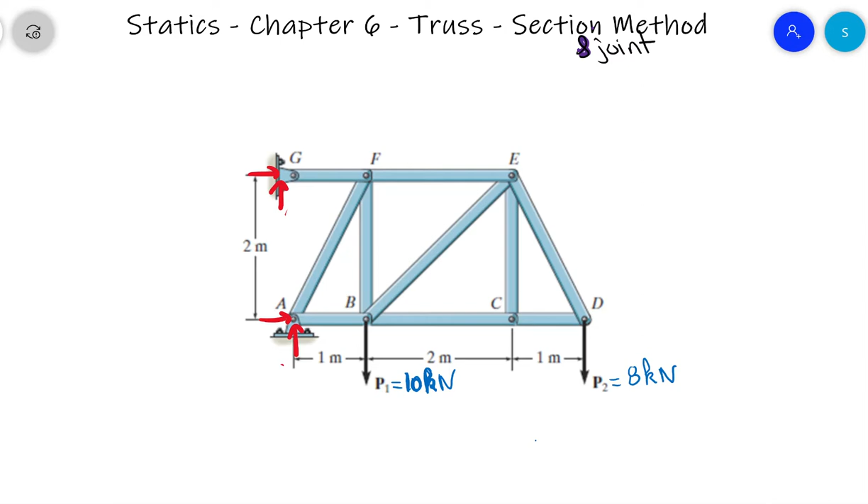Look at joint C. At joint C, we have 3 members, and 2 of them are collinear. So this means that the third one is a zero force member, and we do not need to include it in the free body diagram.

I want to show you something, because in your online quiz I asked you to find this. There's a very simple way to find it. We cannot use the joint method because if we look at these joints, we have 1, 2, 3, 4 unknowns. So we cannot use the joint method with just one equation and one free body diagram.

But if we cut here and keep the right side, the free body diagram will be this. We cannot do it with the left side because on the left side there are about 4 unknowns plus those 3 unknowns.

But if we use the right side, what we have is something like that. We have a known force of 8 kilonewton, and we have 1, 2, 3 unknowns. Let me make it a little bit stronger.

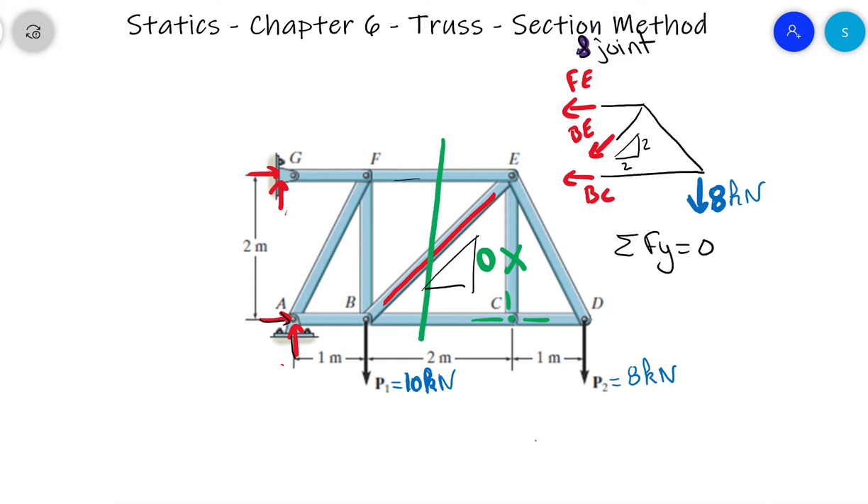So we can write the equation: sum of forces on Y equals 0. We have minus BE times cosine 45 degrees, minus 8, equals 0.

So BE is equal to minus 8 divided by cosine 45 degrees. The minus means it's in compression. 8 divided by cosine 45 is 11.3, so BE equals minus 11.3 kilonewton.

Okay, so we have this one, and now we have BE equal to 11.3 kilonewton. What can we do next?

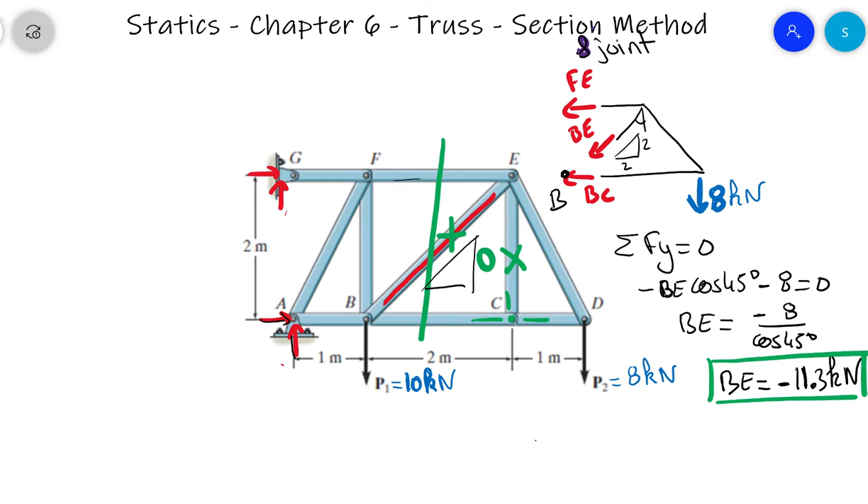Let's use the same free body diagram. We can use point B to solve for FE, and we can use point E to solve for BC. I like to do that — we just get our truss there.

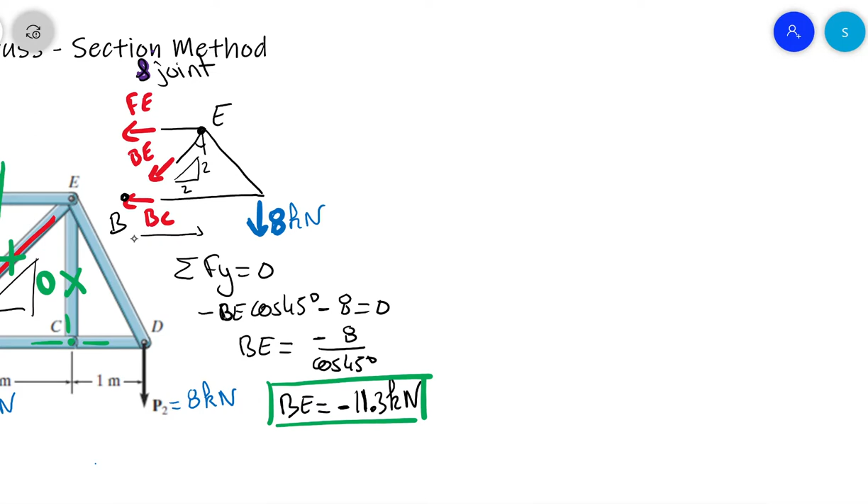Let's take the moment about E. This distance is 2, but we also need the total distance from B — this distance is 3 meters, and this distance is 2.

So let's do sum of moments about E equals 0. We have 8 times this distance — oh, I forgot to write this distance, so that's 1. So 8 times 1, and this one turns in the negative direction.

The only force left is BC, and it's also rotating in the negative direction. So minus BC times the vertical distance, that is 2, equals 0. So BC is equal to minus 4 kilonewton.

Oh, I forgot to write — so it's compression. This one also is compression. So let's call that BC.

Yeah, I didn't write F, BC, F, BE. But I could have. Let's do the moment about B.

Also, we have B. Which one we found? BC, so we found this one. Moment about B, so this one. So we have the 8 that is rotating in the negative direction, but this time is 3, minus 8 times 3, and FE is going in the positive direction. So plus FE, we cannot have the 3 of them in compression.

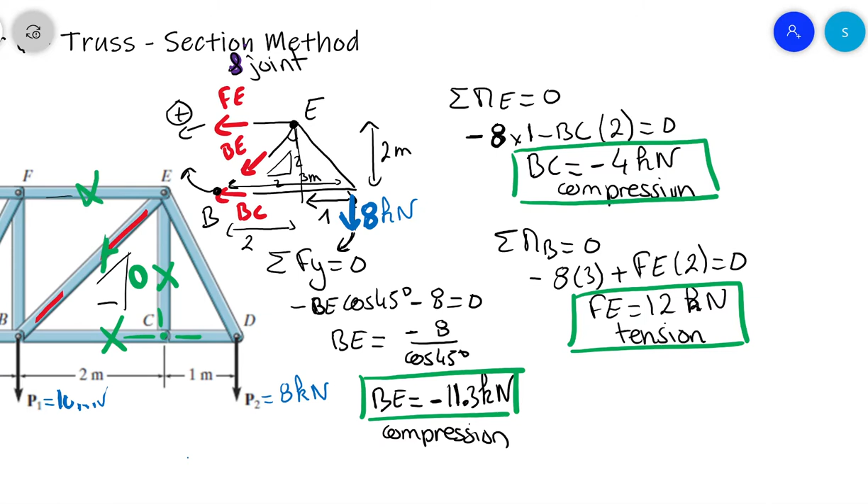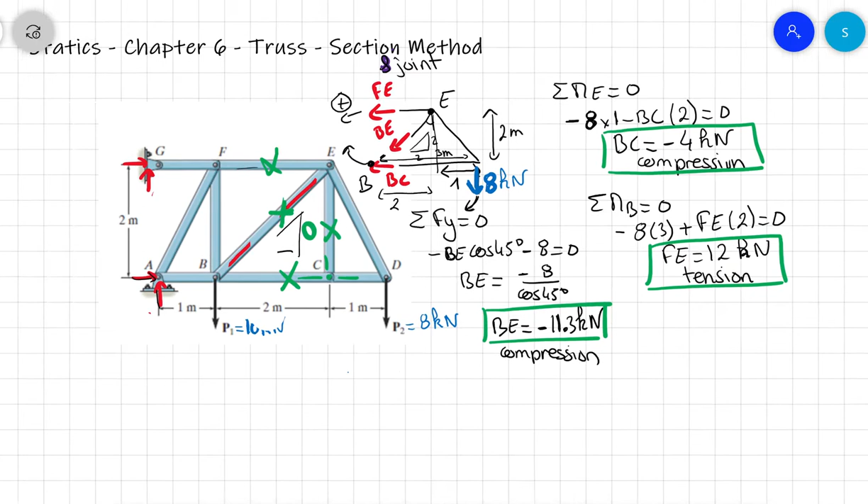Okay, so we have this one. Let's remove my cut because we don't need it anymore. Okay, so maybe now we can use the joint method. Oh my god, that's my previous problem. I'm lost. This one. Okay, we can use the joint method at C.

So if we do at C, so if this one is in tension, if BC, so that one is BC equal 11.3 in compression. This one is also, so it's CD 11.3 in compression. So CD is equal to 11.3 kilonewton.

Let's put a minus just to say that it's a compression. It's not because it's a minus that it's a compression, it's because I guess that it was a tension, so my positive direction is tension. So CD is equal to minus 11.3 kilonewton, is called 11.3 kilonewton in compression.

We missed this one. Let's solve this one. Let's do the joint D. Now we come back on the method of joint. So we have the joint D. So that's my joint D.

We have the 8 kilonewton going down. This one is compression. Oh my god, we are on the joint. So we know it's compression. So it means that the joint is pushing on the member. So the member is pushing on the point D, and that's 11.3. And this one will be up, has to go up. That's ED.

And the slope, we have 1 and 2. 1 and 2. So this is the square root of 5.

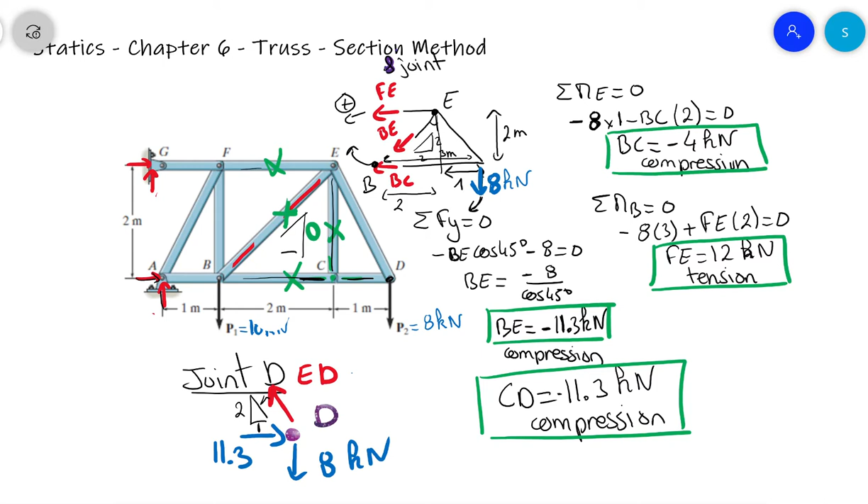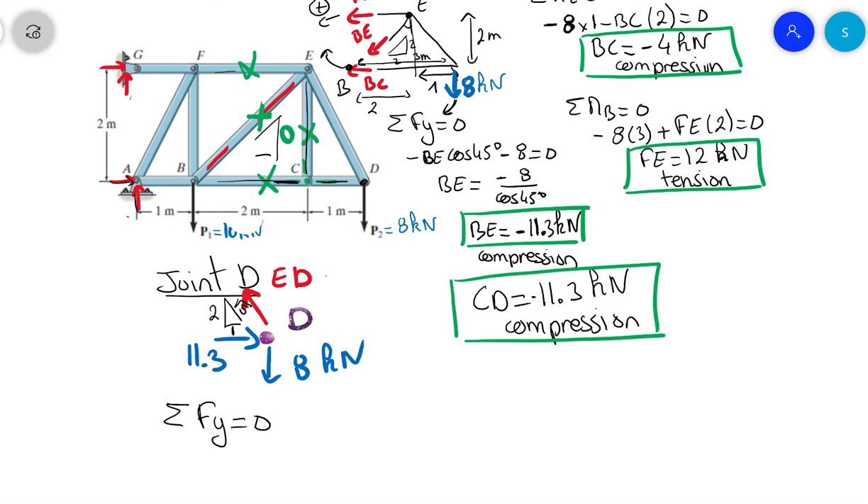Okay, so if we do sum of the force on y, it's equal to 0. We can use either one, x or y. But if we did a mistake at 11.3, if you use x, we will reproduce a mistake there. If you use y, we don't reproduce the mistake. So sum of the force on y equals 0.

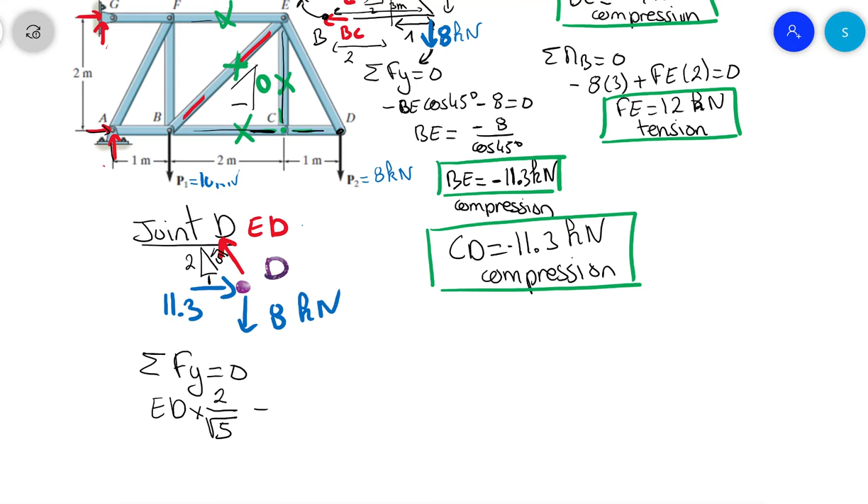So we have ED times 2 divided by square root of 5 minus 8, it's equal to 0. So ED, it's equal to 4 square root of 5. 8 divided by 2, so 4 square root of 5, it's 8.94 in tension.

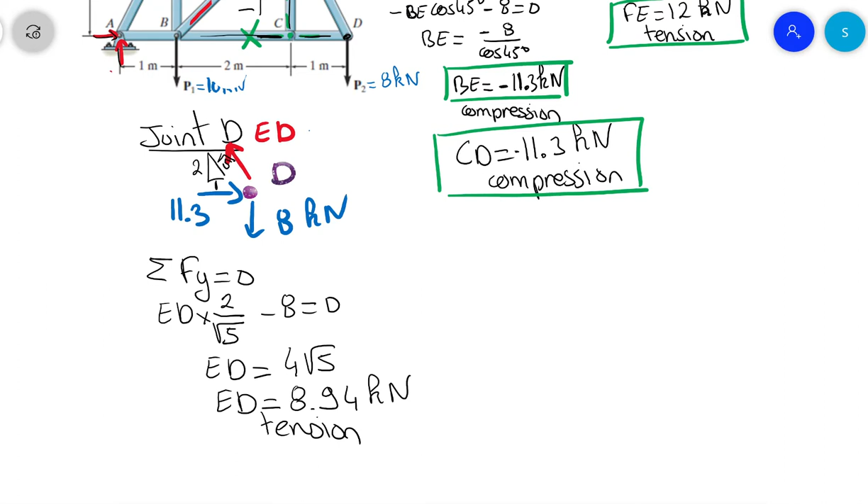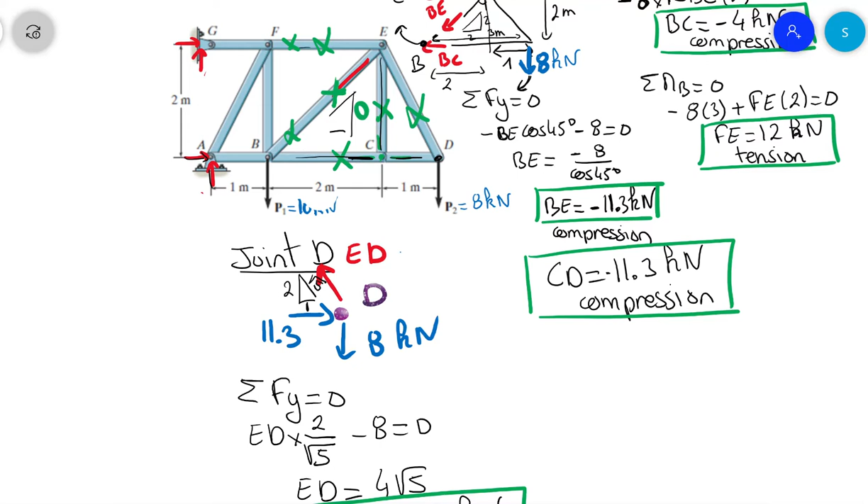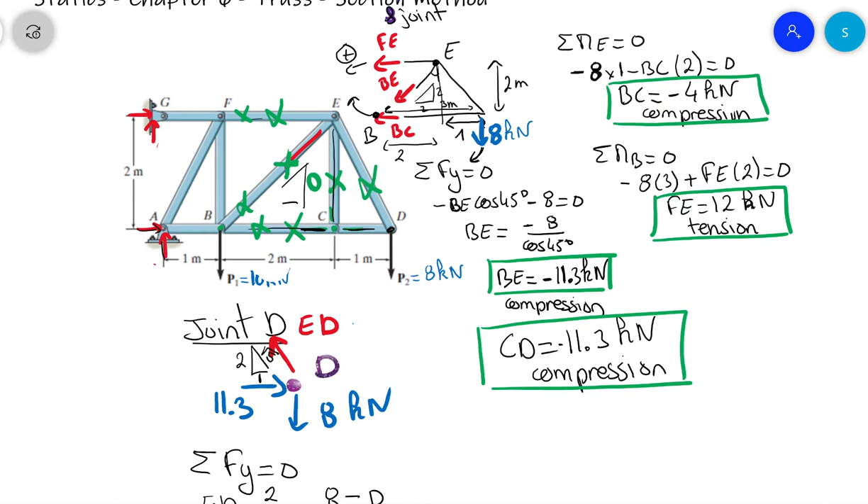Here we go, so we have this one. Okay, so we know this one, we know this one, we know this one. We know everything to the right. At B, we can do an analysis of a joint, and after that, we will know BF and we can do a last joint at F.

So let's do my joint there. I need to do my joint B first. I don't have a choice because here I still have 3 unknown. So joint B. Okay, so that's my joint B.

I will have forces everywhere. So that's my joint B. What I know it is 10 kilonewton. This one is compression, so compression is pushing on the joint, and it's 11.3. This one in BE, we find 11.3 in compression, so 11.3, and we know that the angle is 45.

Okay, and we have force at B, so it should be positive, and this one should be to the right to compensate. Everything is going down and left, so we need some forces up and right. So AB and BF. It's a joint, so joints mean we just have force on X and force on Y available. Either one will work.

So let's do sum of the forces on X. It's equal to 0. We have AB minus 11.3 minus 11.3 cosine 45 degrees. It's equal to 0. So we have AB that is equal to, and it would be plus 11.3 plus 11.3 cosine 45 is 19.3.

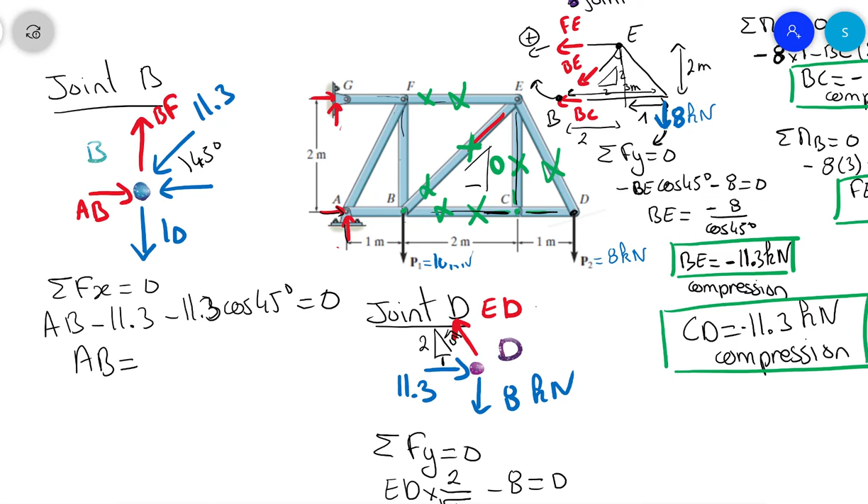Is it BE? 11.3. BC there is not 11.3, I missed that. And my BC is 4 in compression. Okay, this one is 4. I knew that wasn't the right answer. So minus 4...

Minus 11.3 cosine, so 4 minus 11.3 cosine 45, and that's... what did I write? Oh, that should be 8, 12. 4 plus 11.3, cosine 45, 12. So it's 12 kilonewton in tension.

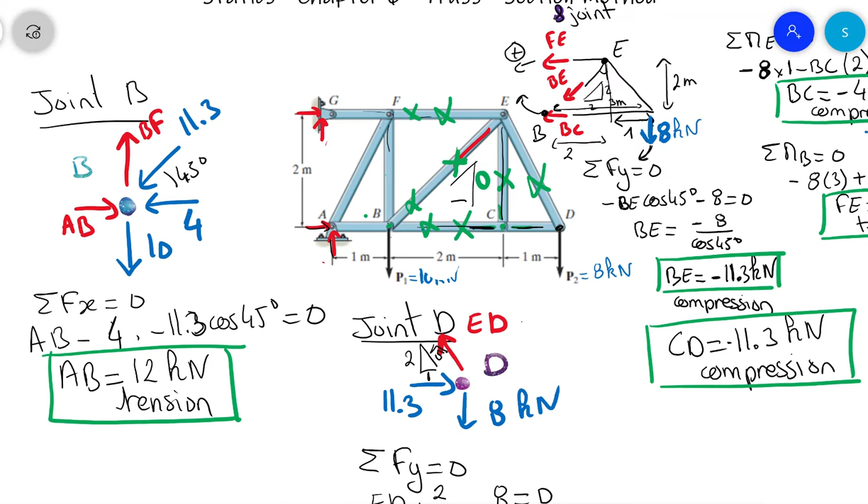Well, we got this one. And if we do joint B, sum of the forces on Y equal 0. So we have BF minus 10 minus 11.3 cosine 45 equal 0. And the 11.3 cosine 45 is always the same. So BF is equal to 18 kilonewton, and it's in tension too.

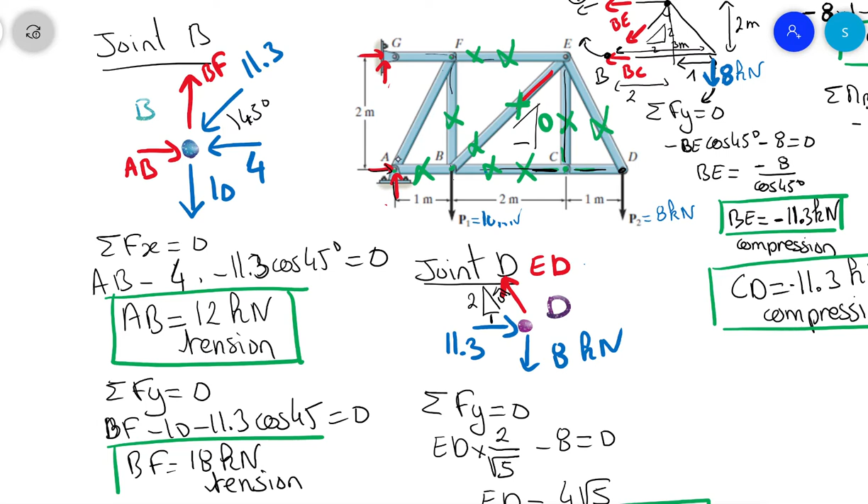We're almost there. Okay, so we find BF. Now we can do the final joint to find the last one. We can also go at A. Oh no, we cannot go at A because we cannot solve for AX, AY, and this one. We need to go at F, so we need to do joint F.

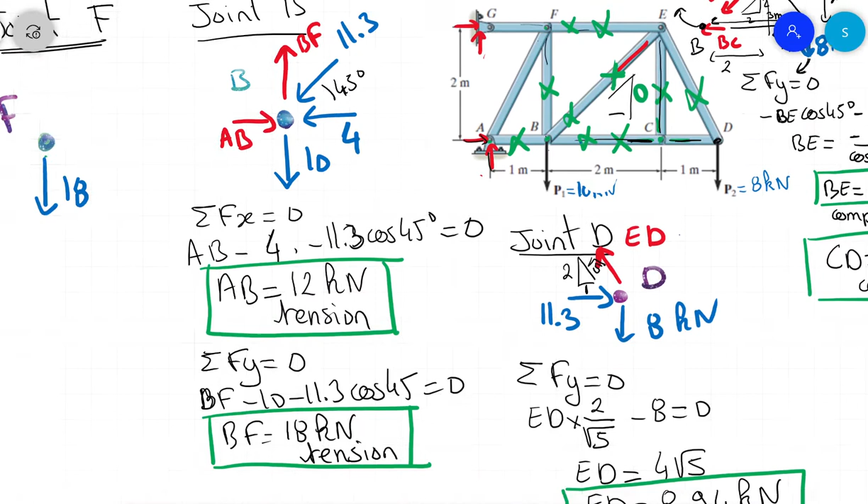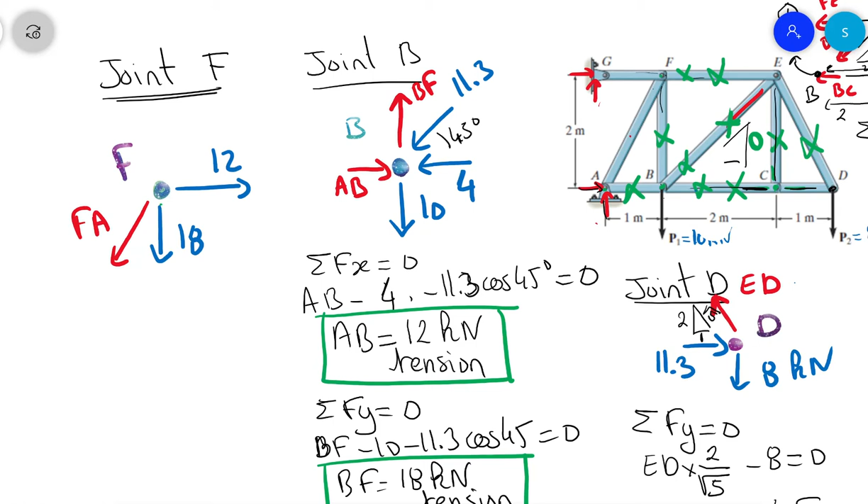12 in tension, so 12 in tension for FE. BF, it was tension too, yes, 18. And the four that we don't know, we have this one, that is Fa. And this one, that is Fg. Oh, this one needs to go up.

Can put it this way. And Fg is easier to guess right, left, up, down with the joint method. And Fa, it's 1, 2, and square root of 5 triangles.

Okay, so let's do the force on Y first, because on X we have 2 unknowns. Sum of the force on X is equal to 0. So we have Fa times, so on X it's 1 divided by square root of 5... oh, not X, sorry, Y first. Sum of the force on Y first is equal to 0. So Fa times 2 divided by square root of 5 minus 18 is equal to 0. So Fa is equal to 9 square root of 5.

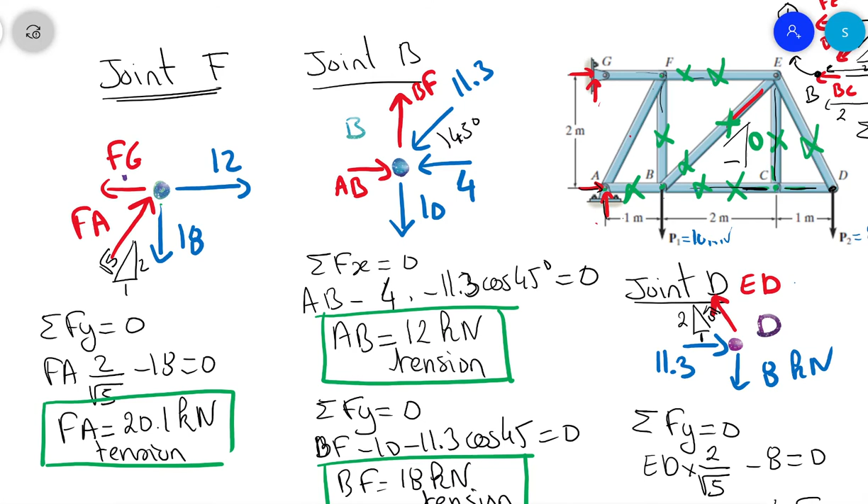It's 20.12, 20.1, and it's tension. And the last equation, the force on X. So we find Fa. Boom.

And the last equation, so we use this diagram, the joint diagram. Sum of the forces on X is equal to 0. So we have minus Fg, plus Fa, this time it's 1 divided by square root of 5. Oh, I didn't put my axes, X and Y. Don't forget your axes. Okay, for this one too, X and Y.

Okay, so Fa times 1 divided by square root of 5, plus 12, it's equal to 0. So Fg is equal to 12 plus 20.1 times 1 divided by square root of 5, and it's equal to... is it too much? Oh, 20.1 divided by square root of 5 plus 12... 20, I have 21.1, 21.0. So Fg is equal to 21.0 kilonewton, and that's tension.

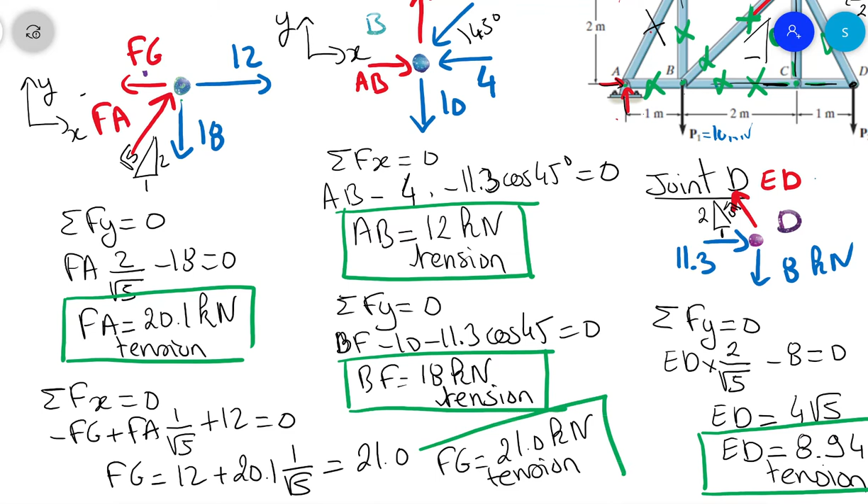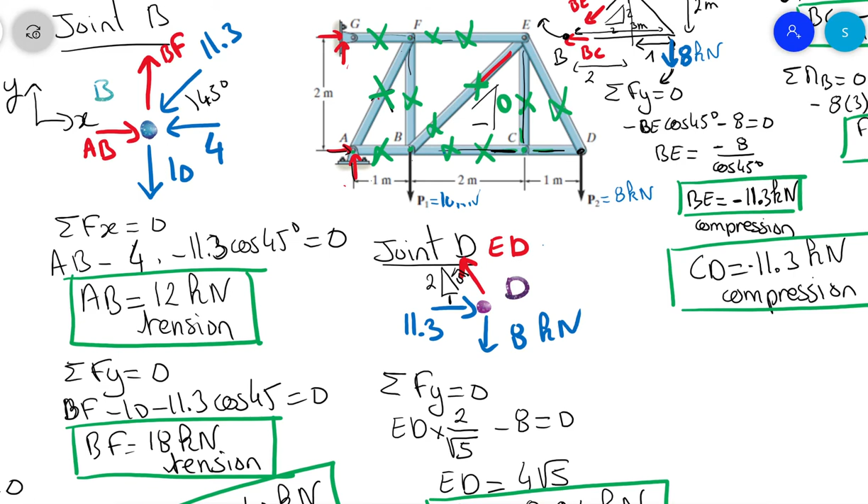And that was our last answer. So here we go. So to solve for all those members, we did a few free body diagrams, a few equations.

You are free to use method of sections and method of joints in the same free body diagrams. If you do your project with a truss, that's why I recommend to really go step by step and find the right method and the right free body diagram to solve for just one unknown at a time. So that will be easier to program instead of having a system of matrices, for example, to solve. And you're able to solve a huge truss if you go with the right path with just Excel, because it's just like simple equations where you solve for one unknown at a time, or you can use MATLAB.

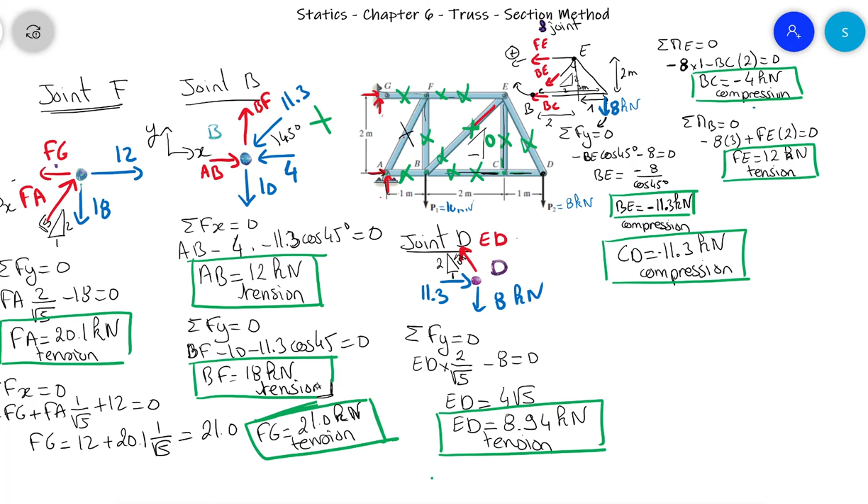And I will show you how to do that if you do the project with a truss, depending on the semester. So that's it, that was your last problem for truss. Keep practicing any shape, any angles, any method, the one you are more used to use. But I would say sometimes the combination of both methods is great. Don't forget to look for zero force members if you can, that will be helpful. So congratulations, see you in the next chapter.